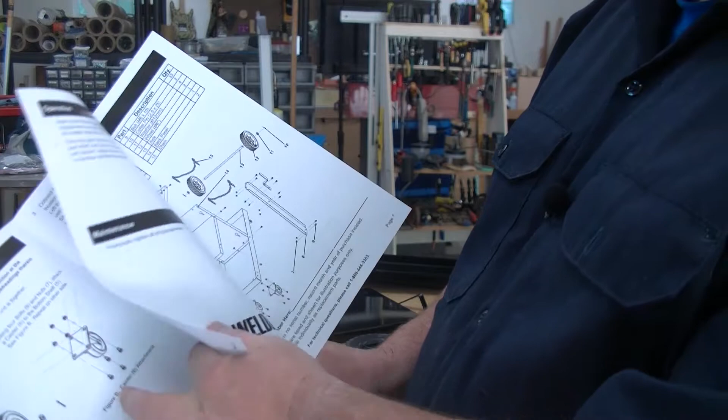They took enough time to show you how to put a cotter pin through a hole on a shaft with a washer, but they're not going to tell you how to put the rest of that together. Now, you can figure out how to do this. I can figure out how to do this. This is more anything from a technical writer standpoint.

If you're going to go through the effort and you are only limited to this many pages, make the print a tiny bit smaller, use this big empty space that you have over here. How many times do you have to remind us that this is a Chicago Electric product? Okay, that's a good place for that. Okay, well I just saw that, so why do I need to see this again? Make this a little bit smaller. If you're going to spring for 3 drawings, spring for 5. And now you've got this big empty space here. This could have been tightened up.

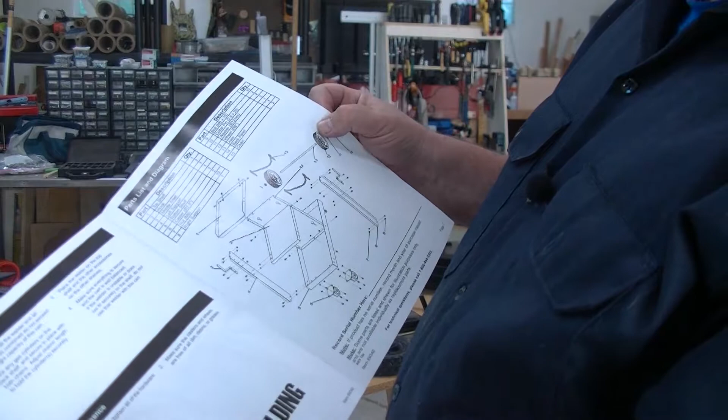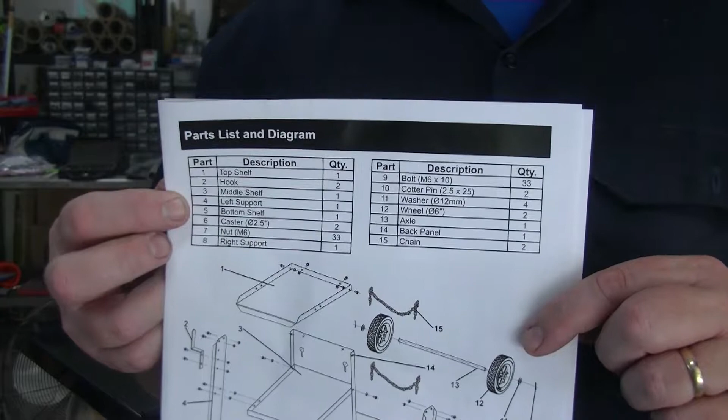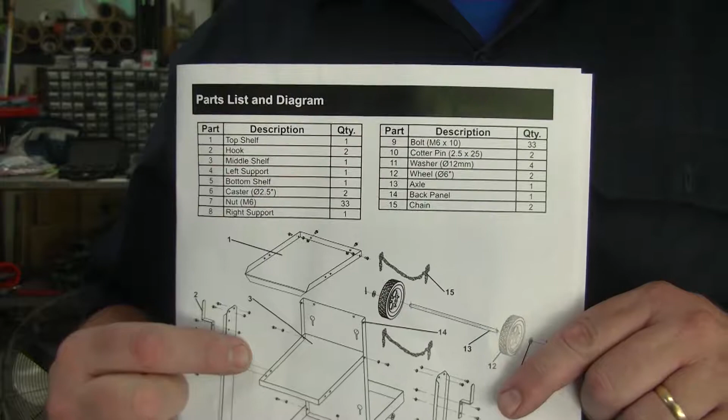That's handy to have, but let me tell you something. If you don't already know this about Harbor Freight or any of the Harbor Freight brands, you need to know this: a parts list and diagram here is absolutely zero assurance that you can get a part for this. Let me say that again. Just because there's an exploded parts diagram and a part number does not mean you can get that part, okay? Because I have Central Machinery stuff in this shop that is currently in production that I cannot get parts for. Currently in production, and I cannot get parts for it. Let that sink in to you.

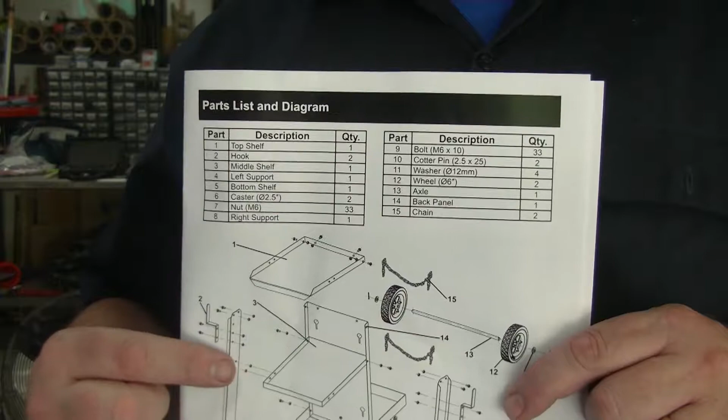One of the reasons you go with companies that charge a little bit more for their items is because there is a supply chain. I can go somewhere and order a part. I can go to the manufacturer or they will give me the specs and I can go somewhere else, like Grainger, and order a part like this.

This is one of the big things that always cheeses me off and why I'm always reluctant to buy stuff. But if I spent all my money on the welder, then I don't have any money left over, and I've got to find the low money item to get my job done. Okay, I'm stepping off my soapbox. I'm gonna get this thing put back together. Sorry about that.

All right, there we are. Can we even see the silly thing? Yeah, we can, we're all right. I'm going to stand in front of the camera again too, because that's always the sign of a good filmmaker, right? So if you're at all familiar with the concept of mise en place, if you have all your tools in one spot, you can put this thing together in 15 minutes. It's just not that hard.